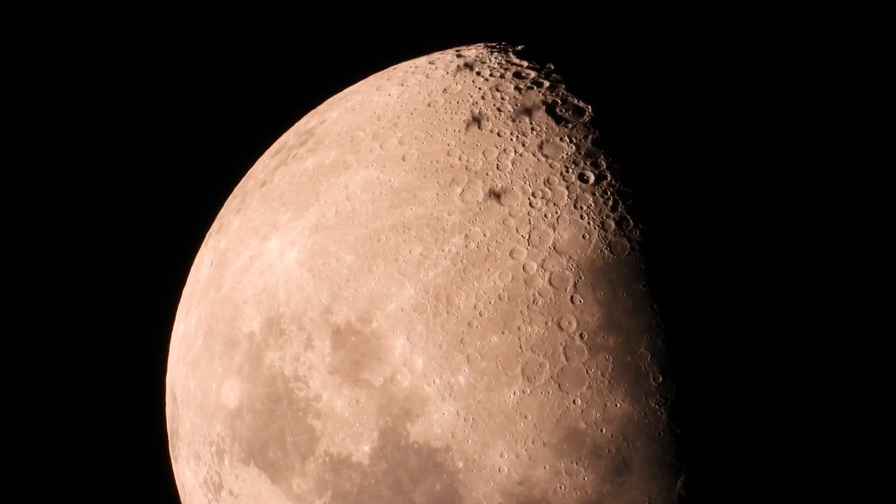As of 2022, roughly half of the world's population experienced severe water scarcity for at least part of the year. According to UNESCO, climate change is projected to increase the frequency and severity of these phenomena, with acute risk for social stability. While this is a current reality for almost half of humanity, our top scientists are busy considering how to build and colonize the Moon and Mars.

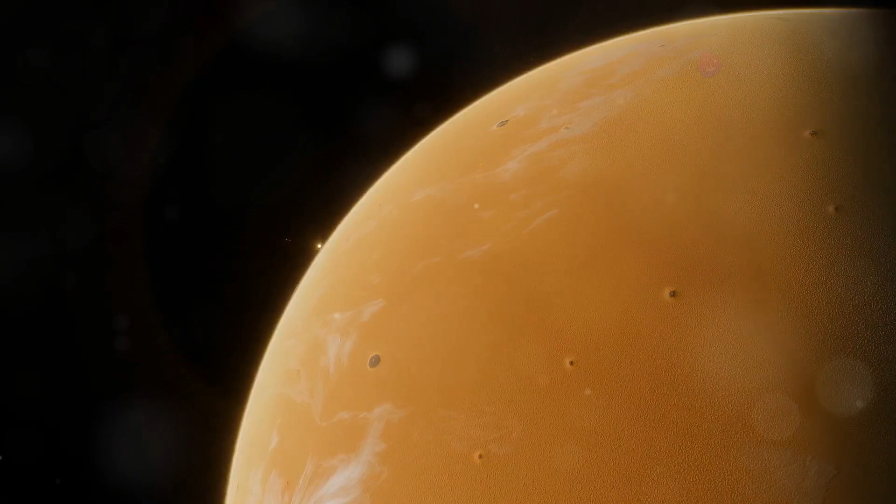A mere trip to gather samples from the desolate plains of Mars would come at the expense of billions of dollars, with results that would take decades from being realized. Enormous amounts of labor and capital are being spent on these endeavors while overlooking the enormous amount of untapped capacity here on Earth.

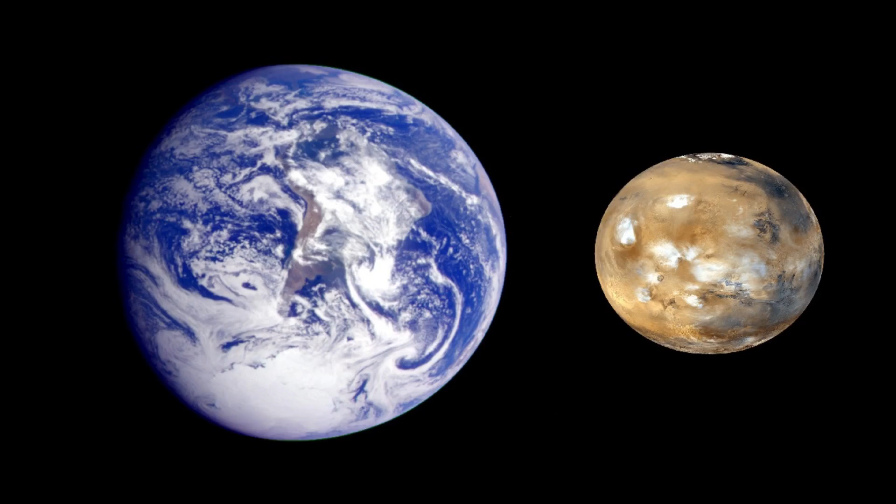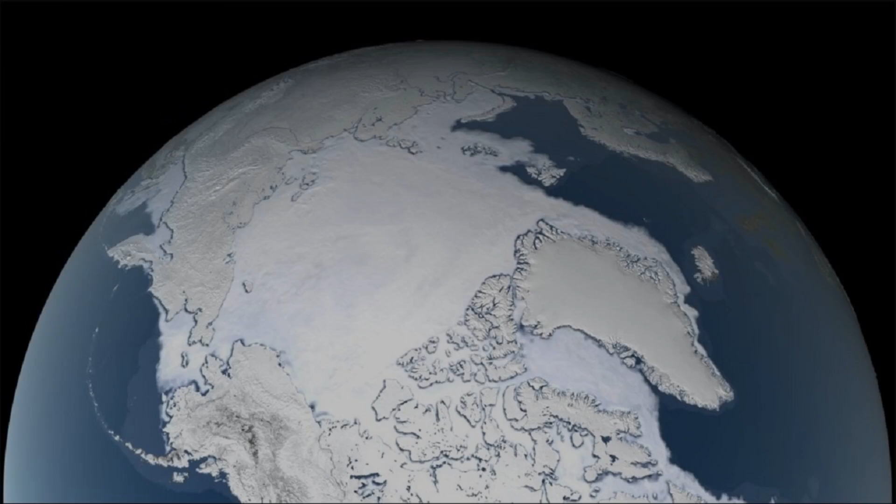There are approximately 19 million square miles of desert land here on Earth, which constitutes about a third of the Earth's surface. Desert is defined as arid land with sparse vegetation, specifically receiving less than 25 centimeters or 10 inches of rainfall annually. It is largely a result of environmental factors which keep deserts in a feedback loop of no precipitation. The Arctic and Antarctic make up close to 11 million square miles of this land, leaving 8 million square miles of desert spread around the Earth.

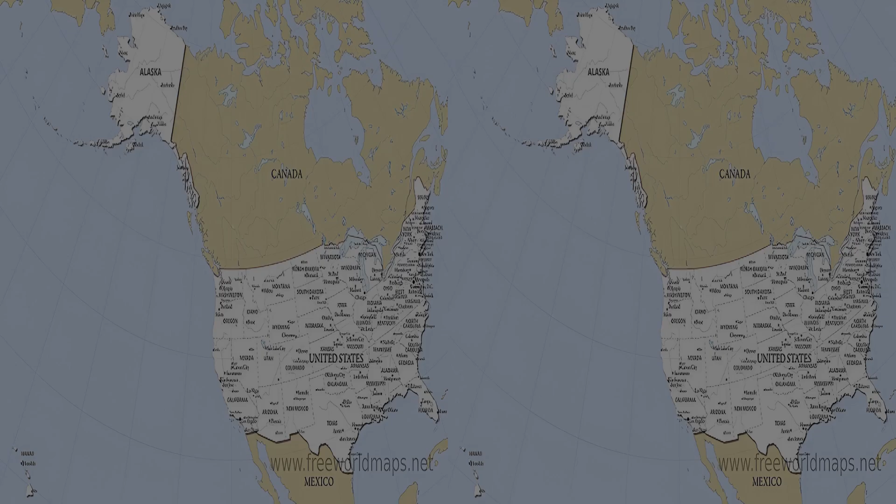This is larger than 2 full-size United States worth of land. 3/4 of this desert land borders an ocean with thousands of miles of coastline. This is land we could transform into habitable and eventually productive arable land, and I will address how it can be done. When I look at the deserts of Earth, I don't see wasteland and desolation. I see potential.

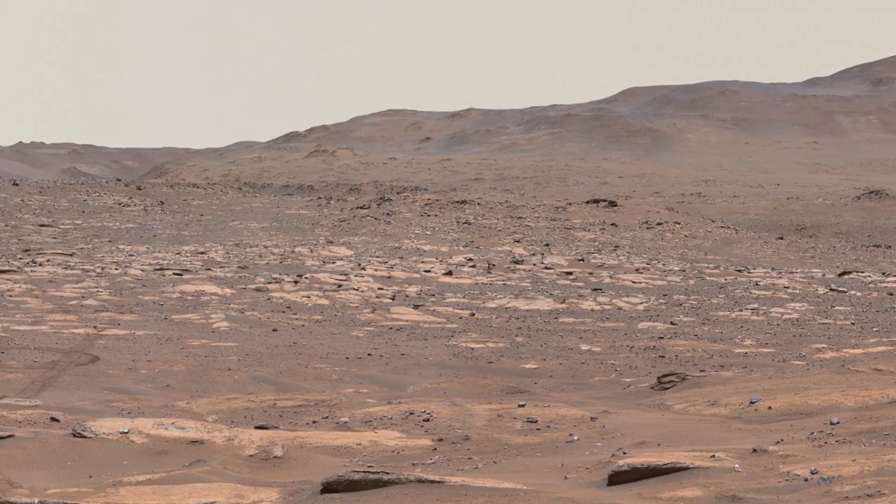In my opinion, what we need to combat climate change is more climate change. We need to get ahead of it, and we can do so by geoengineering our planet's deserts. This endeavor should take precedence over Moon and Mars missions. There is no reason to travel hundreds of millions of miles through space to bring life to a desert planet when we haven't brought life to the deserts on this planet.

I have a plan that will help neutralize man-made climate change. It will neutralize the threat of rising sea levels. It will store more CO2 over time than any other industrial scheme possible. It will create environments that will preserve more and greater biodiversity, and in the long term, create arable and well-watered land to accommodate billions of people.

This is done by turning the desert waste of Earth into fertile forests. This is a process that will take a few decades, but would help alleviate many of our future generations' problems with the looming water and land scarcity they will face. I have invented a device which I call Miner's Distilator. This device, if used in conjunction with my plan, could change these deserts into flourishing forests.

Before I go any further, I understand there will be those who have reasonable objections to this proposal. However, I ask you to be mindful of one thing, namely, the importance of this land being productive and inhabitable is more important to humanity's future than all objections presented. This is a solution to a big problem. If we make more big problems as a result, we'll find solutions for those as well. It is what humans are good at.

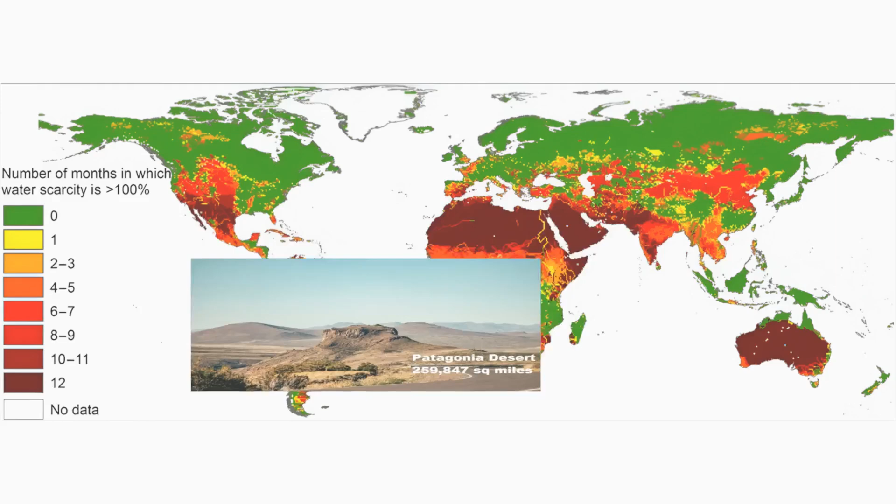To those who are concerned about issues that may arise from this geoengineering project, I have this to say. Every generation is faced with their own problems they must solve. This is part of the collective human experience. I'd rather leave our children too much nature, too much fresh water, and too much life, and the problems that come with it, rather than not enough nature, water, or life, and the problems that come with that. Let me explain what my invention does, and then I'll share my vision of how it can be used.

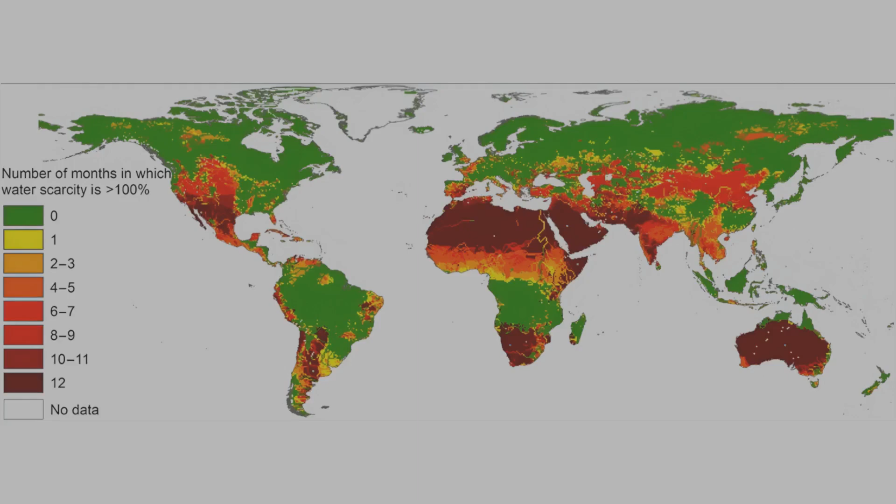My device will create pure, distilled water from seawater. I've modeled it to run on propane, since that would be ideal in an off-grid situation. The device has very low maintenance and no moving parts. It can also be designed to operate on electricity instead. I have made models to show both.

My vision would see these distillators spaced out along the coastlines of deserts around the world. They would be spaced every half mile or about 800 meters. They would have a fuel or electric line running to them underwater and a distilled water line running back to shore above water. Where the distilled water line reaches the shore, a plastic-lined channel for the water would be dug.

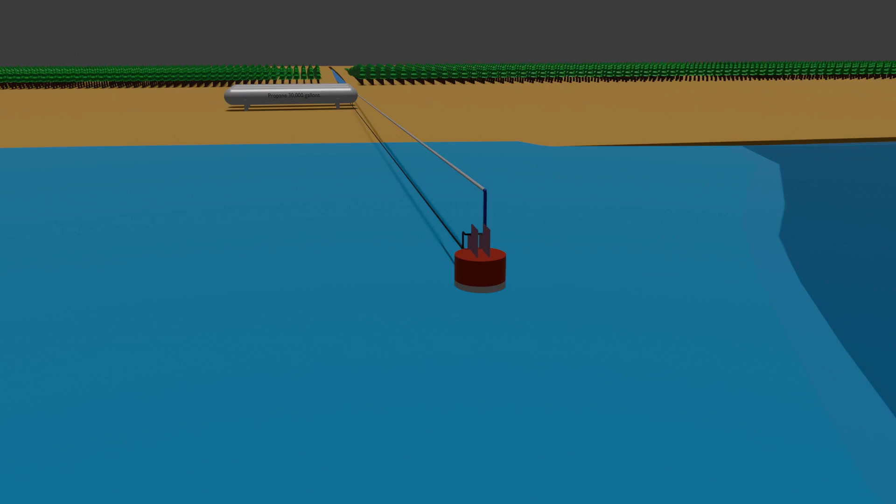The channel's length will travel inland and grow over time. It will likely need a series of pools and pumps along the way to help it overcome differences in elevation. Along this plastic-lined channel, thousands of microchannels will be cut into the desert sand, leading hundreds of meters in each direction. These microchannels will be used to drip irrigate thousands and eventually millions of differing species of trees.

This will require enormous manpower, of course. My estimate would be 10 people for every distillator. People need water too, so you don't want to overburden the production of the distillator while trying to geoengineer the terrain. For example, let's say we decided to do a 1,000-mile stretch of desert coastline. This would require 2,000 distillators and 20,000 people. These could be volunteers from abroad.

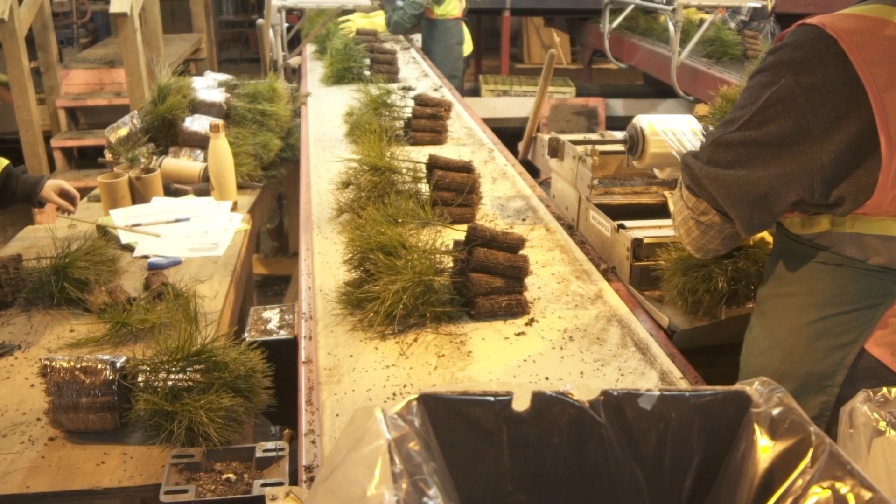We could find 20,000 out of 8 billion people willing to be our Earth Warrior volunteers and commit a year of their life to the cause. I have faith there are at least this many environmentally minded young people who would love such an opportunity. As our Lord Jesus Christ said, "It is more blessed to give than receive." It is the human desire to be a part of something bigger than ourselves; to look back and be acknowledged for providing a better world for millions, possibly billions of people would be a great honor.

We could rotate out those who have completed their time each year for fresh volunteers. They would need food and shelter in addition to the fertilizers, tools, seeds, and everything else required to complete the mission. What they learned the first few years would set the template for all successive years. This type of volunteerism and water management to bring water to the desert using my distillators would be the most fiscally conservative approach for long-term water security in distant regions of the world.

If volunteers can't be found, we could allocate money to pay poor, unemployed people in the affected countries to do the work. The bottom line is that if we throw enough water, manpower, and vegetation at this problem, we can break the cycles that cause deserts to be deserts. Others have put forth similar plans, which have put the price of greening just the Sahara Desert alone at anywhere from $1.9 billion a year to as much as $2 trillion a year. I believe with my invention and plan, we can do that at a much lower and reasonable cost.

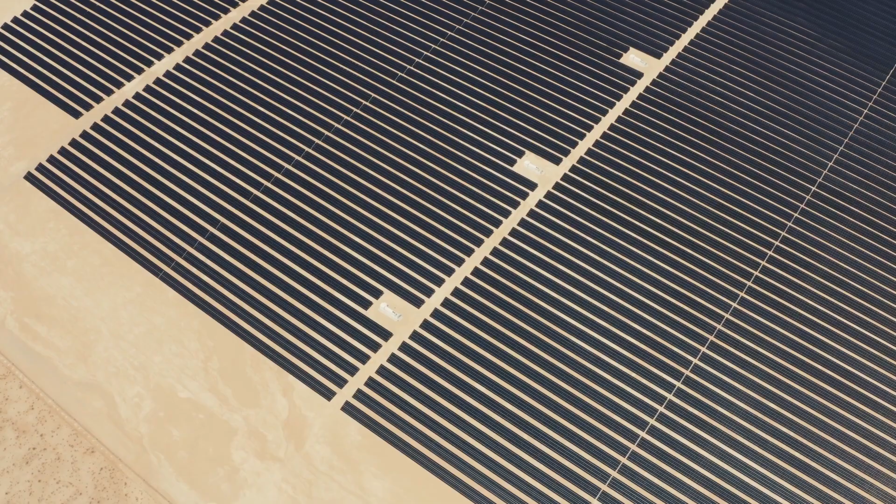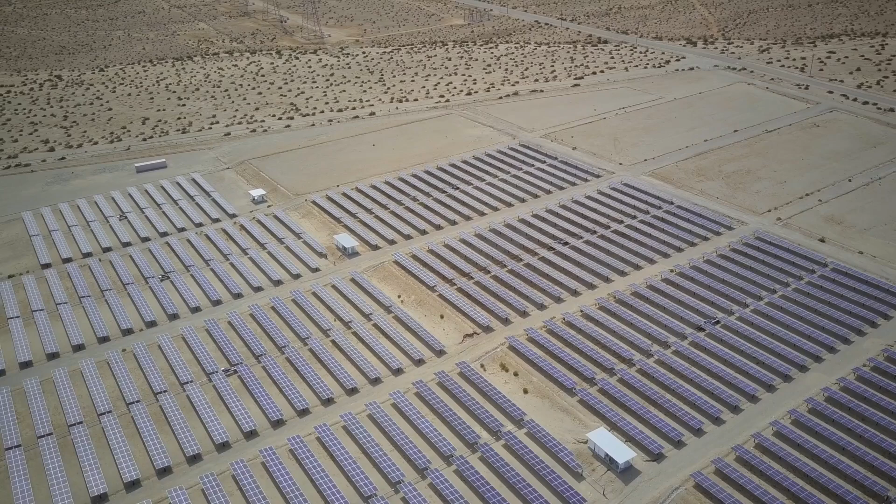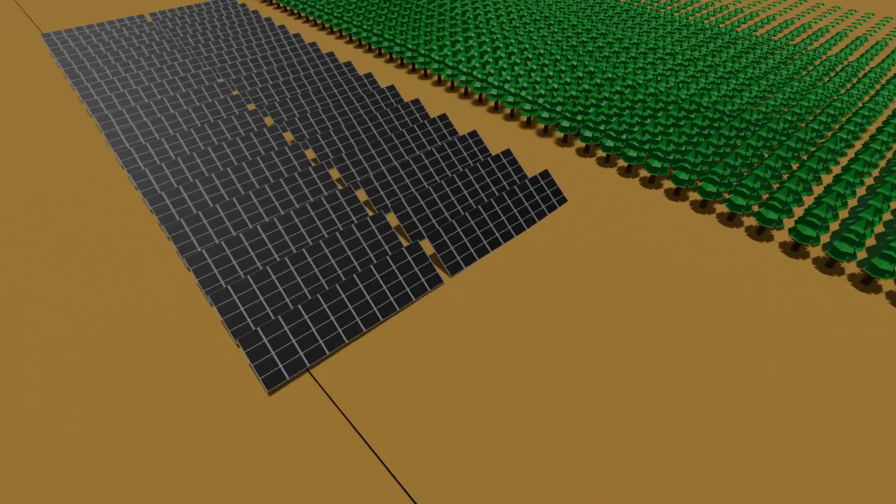With a higher initial startup cost than propane, electric-powered distillation may be the way to go. 2,000 distillators would require hundreds of solar arrays costing as much as $1 billion. Since the energy would be used solely for the purpose of the project, there would be no need for battery storage. The power could go straight from generation to the heating element. And while propane can operate continuously, electric models could only operate on average 10 to 12 hours per day when the sun is shining. A benefit to this downtime, however, is the dissolution of accumulated salt back into the ocean throughout nighttime hours. While electric-powered distillation makes for a heavy upfront cost, the hardware only needs purchased once.

For places like Australia and countries on the Arabian Peninsula that currently have available electrical power, transmission lines could be run to the distillators and power them directly. While the immediate price of this water will be expensive, the long-term effects of the water and vegetation can eventually break the environmental cycles creating desert conditions, even on continental scales. The result of accomplishing this is invaluable.

The end goal is to capture, restore, and expand the freshwater cycle in the water-scarce places of Earth, as well as capture and store carbon dioxide from the atmosphere. In the future, this increased water cycle could produce and supply new rivers, lakes, and aquifers for growing populations. The capillary distribution of fresh water on the sand, in addition to the shade from the plants, will allow more water vapor from the ocean to condense over the desert and precipitate both by the shore and eventually further inland.

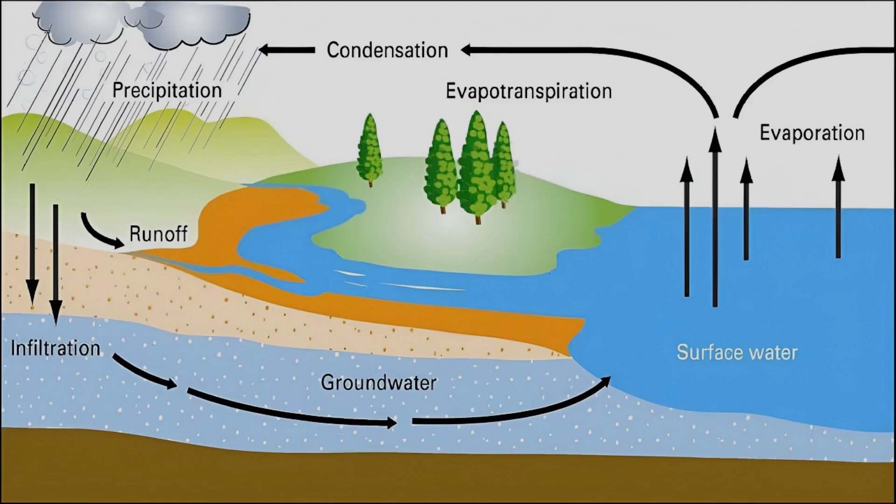Once the forests are well established, the combined water from evaporation and the transpiration of the plants will also begin to form cloud cover and precipitate, thereby creating a positive feedback loop of the water cycle. This will continue the cooling process of the desert surface, allowing more water to enter and remain in the environment.

Eventually, as trees and bushes shed leaves, ground cover will begin to accumulate. This will allow the growth of organisms that will turn organic plant matter into soil. Long-rooted grasses should be gradually introduced to help speed up the process of transforming the soil. Over the course of decades, this vegetation and water will enrich the land and make it suitable for agricultural use. Proper management of land will ensure it remains arable for future generations.

This transformation of vast land area would provide room for trillions of new animals to reproduce and thrive. As a safeguard, we could preserve 2 to 3% of the current deserts as habitats for all the desert species in the world. Most species would simply adapt to the changing environment as has happened since the beginning of time.

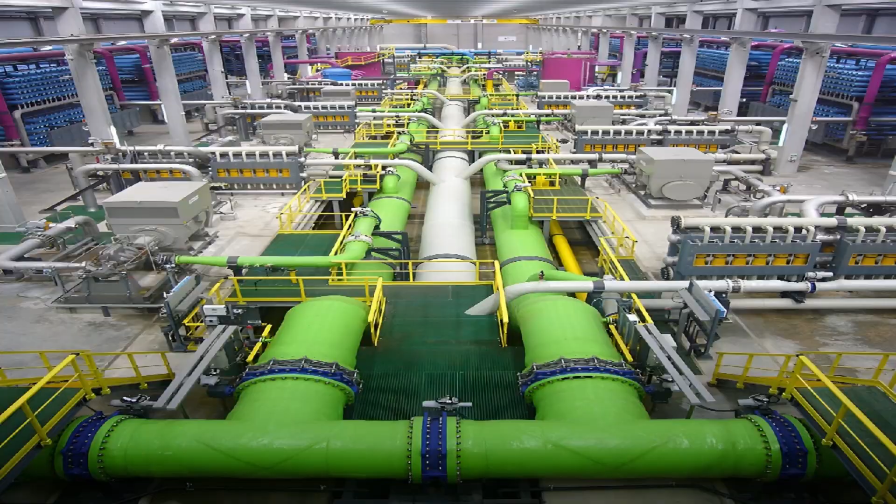Some may argue the distillators will damage the ocean. The two main types of water desalination, reverse osmosis filtration and multi-stage flash distillation, dump highly salinated brine water directly back into the ocean in vast quantities as a byproduct of their operation. My invention will be like 1,000 pinpoints of high salinity stretched over hundreds of miles.

It is scientifically documented and proven that if nature is left alone, it will heal and restore itself. This is evidenced by studies of rainforest, which were cut down and grew back on their own, as well as the Pacific atolls, where multiple nuclear tests were conducted. If we run this geoengineering project for 25 years and complete it, the ocean will heal itself in a matter of time and will be just fine.

Any accumulated salt will eventually dissolve back into the ocean and reach a point of normal salinity again. All the CO2 expelled in the process will be absorbed by the forest we grow. That's how my device can be used to fulfill my plan.

Now, for those who would like an in-depth look at how my distillator works, I've prepared a technical description the best I could. I also have a release of patent with the full description of the device along with the 3D models. The propane and electric-powered versions of this invention described herein are to be considered a means to supply Miner's distillator as a geoengineering device in remote off-grid places where it can be fueled by propane gas or solar power with very minimal maintenance.

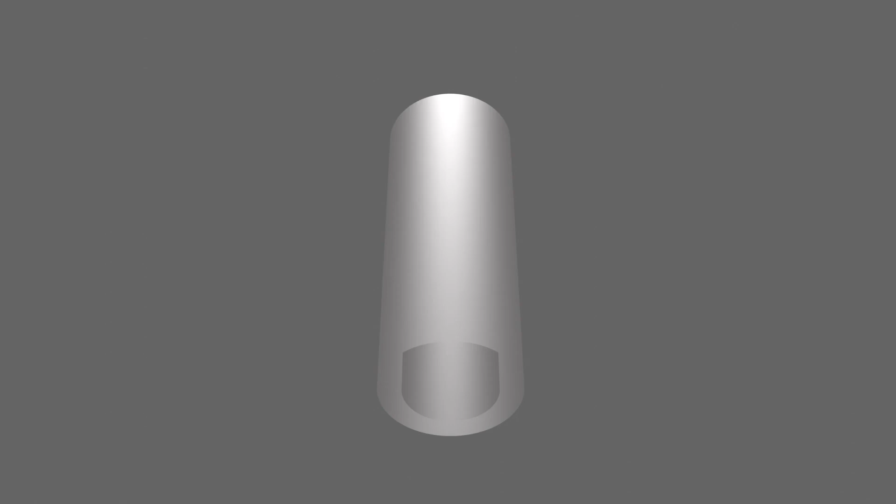Miner's distillator consists of two tubes, an inner inside tube and an outer outside tube, of a saltwater and temperature-resistant plastic of similar length. The smaller diameter inner tube is positioned within the larger diameter outer tube with a gap between them sufficient for the steam piping and the air and fuel supply piping to fit. The inside tube remains open at the bottom to allow seawater to fill its volume, while the gap between the inside and outside tubes is sealed at the bottom, creating an airtight seal between the tubes.

The top portion of the inside wall of the inside tube, that which is in contact with boiling water and steam, will be coated with a heat and saltwater resistant ceramic, fiberglass, or other heat protective material sufficient to insulate the top of the inside tube from heat deformation.

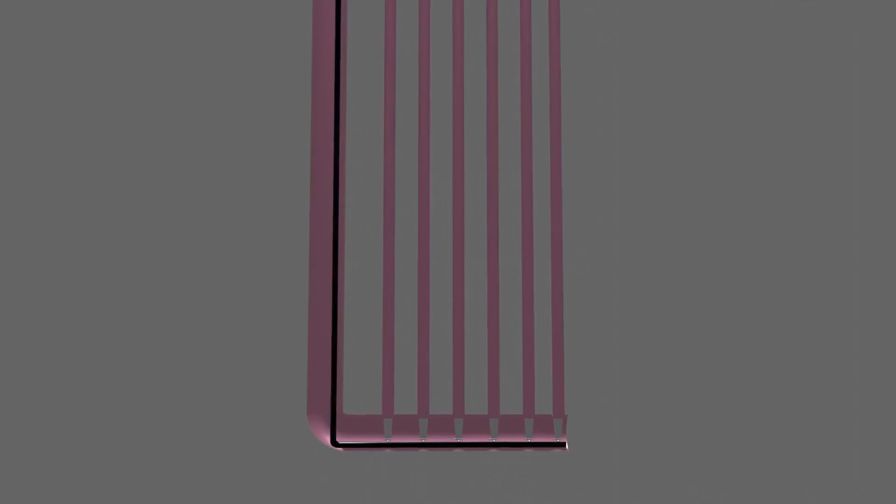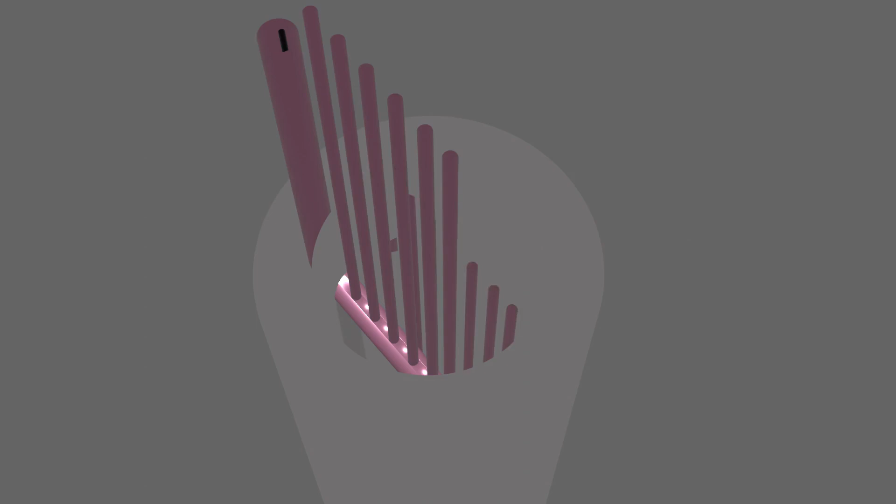A fuel and air supply line running through the gap between the inside and outside tubes will bring oxygen and fuel down to burner assemblies that are inserted and rest suspended in seawater within the inside tube. These burner assemblies will have stainless steel pipes that go up through the subdome and dome to transfer heat and exhaust upwards. Subdome is defined in this description as the dome that covers only the inside tube, thereby differentiating it from the dome covering the outside tube.

The inner inside tube and the outer outside tube are sealed with a gap between them. A vacuum is pulled within this gap in order to minimize any thermal losses from the stainless steel pipes transferring the high pressure steam, as well as to minimize thermal transfer between heated seawater within the inside tube and colder seawater outside the outer tube.

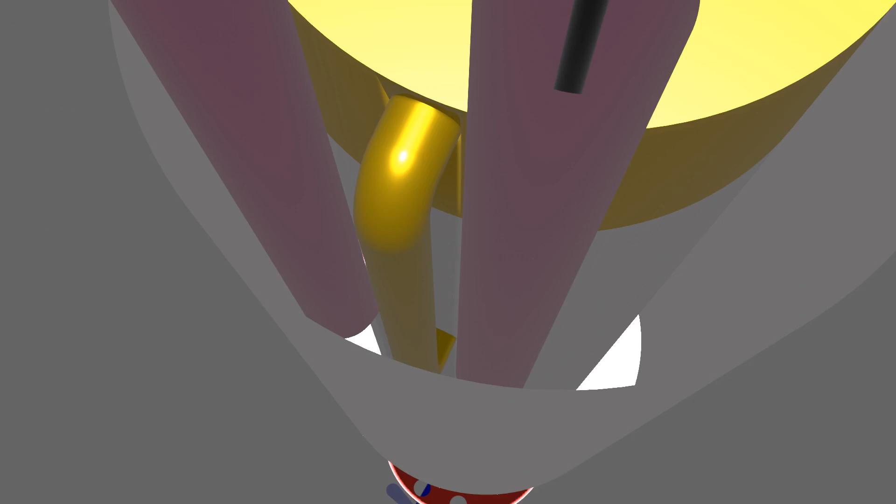The stainless steel piping transferring steam will begin at the subdome, travel throughout the vacuum-sealed gap, and re-enter through the inside tube below the heat exchanger assembly. It will then coil its way down, suspended in the seawater, until it terminates in a straight pipe and exits through the bottom of the inside tube.

It will then rise vertically to a height several meters above sea level outside the outer tube. At the maximum height of this pipe, it will be joined to tubing that will extend to the shore as it gradually slopes downward past the shoreline. The inside tube will be sealed by the subdome, and the outside tube will be sealed at the top with a dome. There will be a vacuum-sealed gap between the subdome and dome as well.

The conjoined tubes are submerged vertically in the water, while the upper portion, specifically the subdome and dome, remains above water. The device is buoyant, so it will float in the water. It will need anchors and framing to stabilize it in place at the correct height.

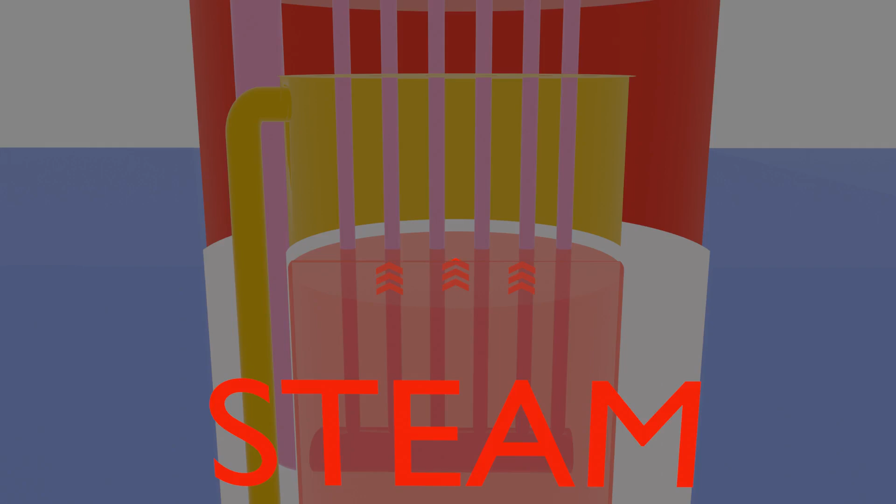As the water is boiled, the steam will rise into the subdome. Since the steam is at high pressure inside the subdome, it forces its way out of the inside tube through an opening in the subdome and down into the stainless steel piping located in the gap between the inside and outside tubes. Since this gap is a vacuum, there's almost no thermal loss in this transition, as the tube remains extremely hot and the steam remains a vapor as it travels downwards.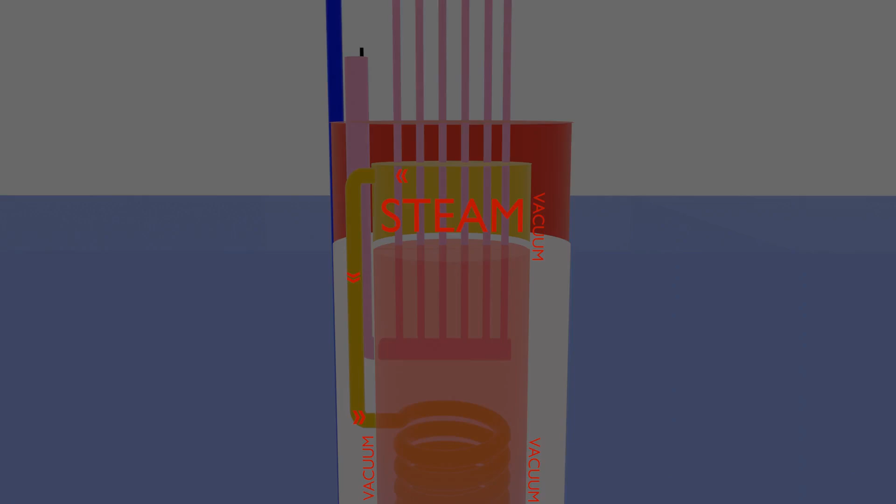This high-pressure steam, which travels from the subdome into the vacuum-sealed gap, then enters back into the inside tube at an area just below the heat exchangers. As the pipe re-enters the inside tube, the steam begins to shed its heat as it warms the cooler seawater within. This thermal transfer preheats the water before it rises to the burner assembly. As the steam loses its latent heat, it condenses back into purified water. As this purified water travels down the coiled piping, it continues to shed its sensible heat into the surrounding seawater.

This preheated seawater is forced upwards to the heat exchanger as a result of atmospheric pressure and fluid mechanics seeking to fill the tube and replace the water which is being boiled into steam at the top of the column. The stainless steel pipe coils its way just far enough down the inside tube to bring it to thermal equilibrium with the seawater, meaning it has shed all of its heat into the colder seawater.

The pipe then proceeds vertically downwards as a straight pipe until it exits through the hole in the bottom of the inside tube. The pipe then curves underneath the tubing and travels up the outside tube into the air to a height several meters above sea level. The high-pressure steam will supply enough force to push the freshly distilled water through the stainless steel piping vertically until it reaches its apex. Once it reaches a determined height, it travels through descending piping to the shoreline by the force of gravity.

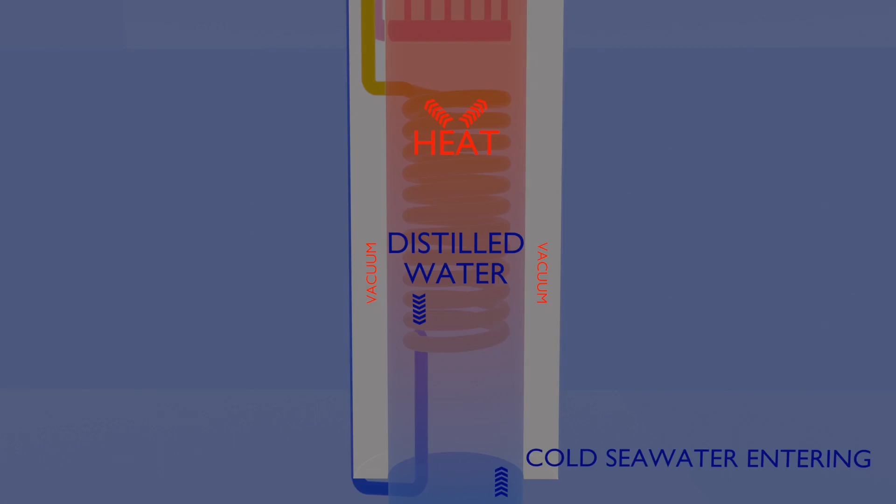As part of the natural process of water separation, less dense hot water will rise in the inside tube as denser cold water settles. Since this is a closed system at the dome and subdome, it does not have atmospheric pressure acting on top of it. The distillator relies on atmospheric pressure and fluid mechanics to push water vertically upward into the inside chamber.

This, in effect, is a heat transfer cycle that recycles most of the heat from the steam. Let's assume the burner assembly will be operating at around 80% efficiency, with 20% losses directly through exhaust. This is necessary because without an induction motor, which requires electricity, to expel the exhaust gases, they have to rise naturally. The combustion gases must therefore exit the exhaust pipe hot enough to ensure the water vapor byproducts of the propane combustion do not condense and drip down into the burner assembly.

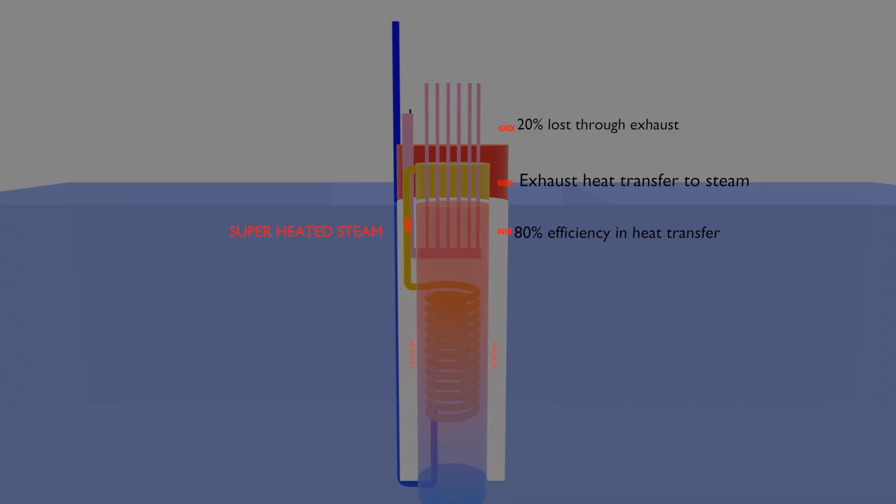Let's assume the steam heat, both latent and sensible, being fed back into the seawater is around 80% efficient as well. In theory, that would mean the system turns every gallon of burned propane into 1.44 gallons of propane worth of heat in terms of thermal transfer. 80% burn efficiency times 80% heat capture efficiency equals 64%, which is added to the original burn. 80% plus 64% equals 144% efficiency from this model. This is due to recycling the heat back into the system.

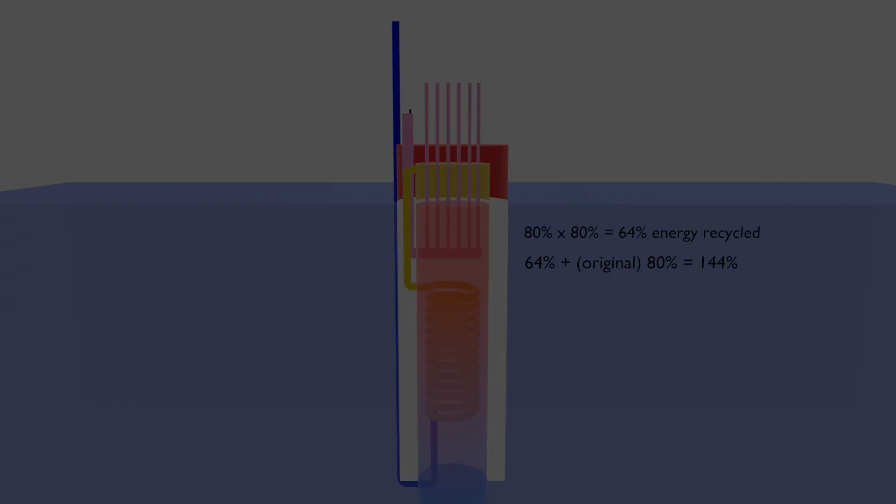While flash distillation plants can repeatedly capture the latent heat from the distillation process, you can only do so much in an off-grid, low-cost, low-maintenance situation. An electric version of this distillator would use heating elements suspended in the water instead of the gas-powered heat transfer exhaust pipes. This would essentially require one large wire being fed into the tube to supply power. This heating element would require a high current and high wattage to supply the needed electricity for operation.

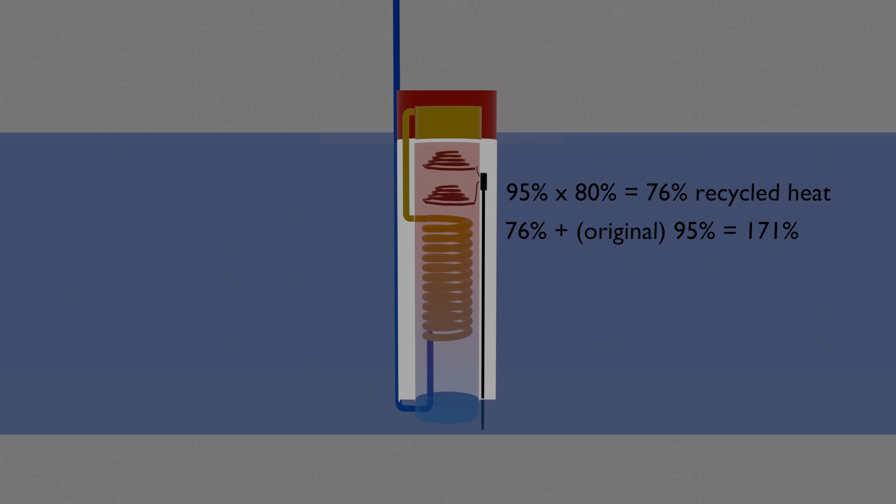In comparison to the propane-powered distillator, the initial efficiency of the electric-powered distillator would be around 95% with 80% return thermal transfer. This equates to about 170% efficiency for the energy put into the system. This makes solar power electrical the most efficient means of operation of the distillators.

Efficiency above 100% does not mean breaking the laws of thermodynamics. A certain amount of energy is needed to turn seawater at ambient water temperature to steam distillate. The water must be heated to 212 degrees Fahrenheit or 100 degrees Celsius, and it must then absorb enough latent heat to phase change from water into steam. 100% efficiency means our steam output is the maximum possible for the energy input. Since this device recycles the latent and sensible heat energy required to turn water into steam distillate, I consider its efficiency to be greater than 100%.

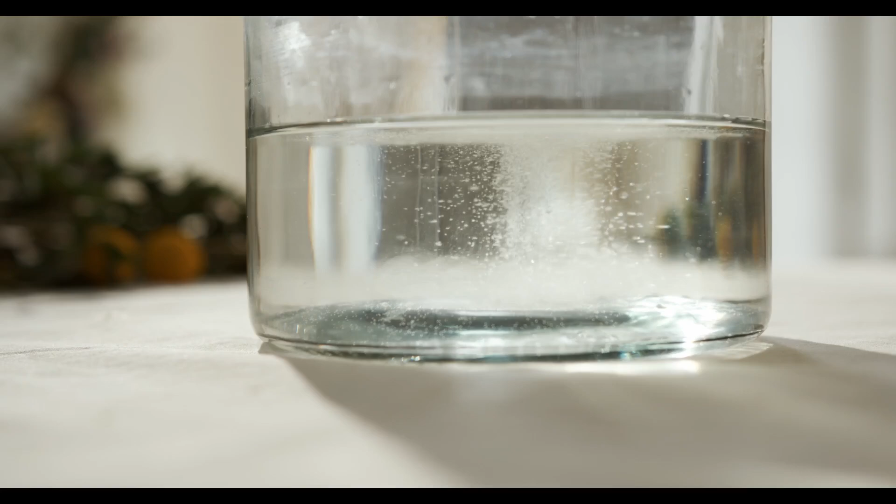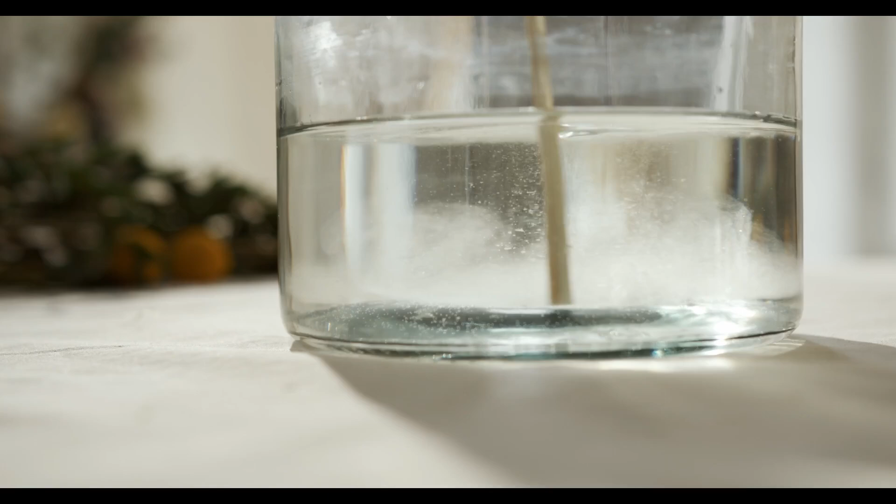Some other considerations about this device is that as the water boils off at the top of the water column, the salt concentration will increase. This salt concentration will reach a point of supersaturation and will begin to precipitate in the solution. Since salt molecules weigh 3 times as much as water, the salt will rain down from the top of the column towards the ocean floor. As it passes through the cooler seawater coming in, this salt will reach thermal equilibrium with the water. This helps preserve the heat energy inside the distillator's inner tube.

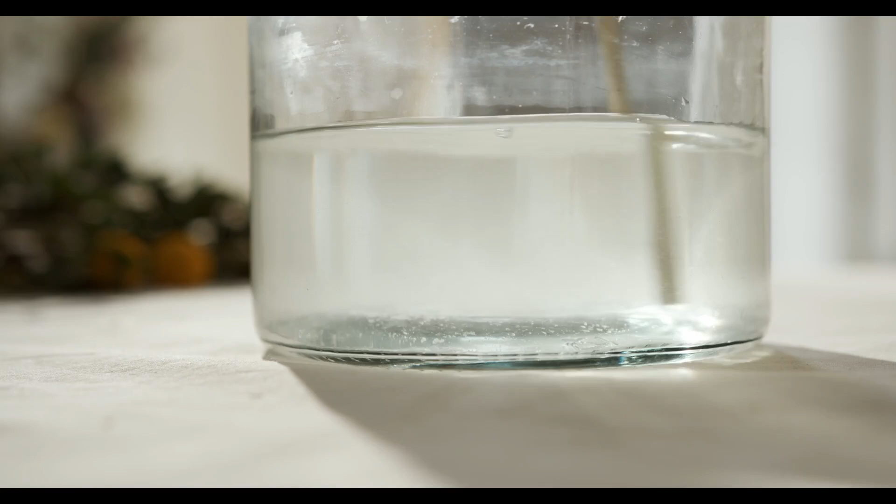The salt will then fall to the seafloor, where it will gradually dissolve back into the ocean as a result of waves and currents. One issue that would need resolved is to build a barrier to keep sea life out of the intake while allowing salt to fall unimpeded to the ocean floor.

For those wondering, 2,000 distillators using 90,000 gallons of propane every 300 days is roughly equivalent to 240 million gallons of propane per year. This is approximately 0.2 to 0.5% of global annual propane consumption. So, over 25 years of geoengineering the desert, we would expect to use somewhere between 5% and 12.5% of just 1 year's annual global consumption of propane. This is all just a rough calculation with a rough outline of what could be.